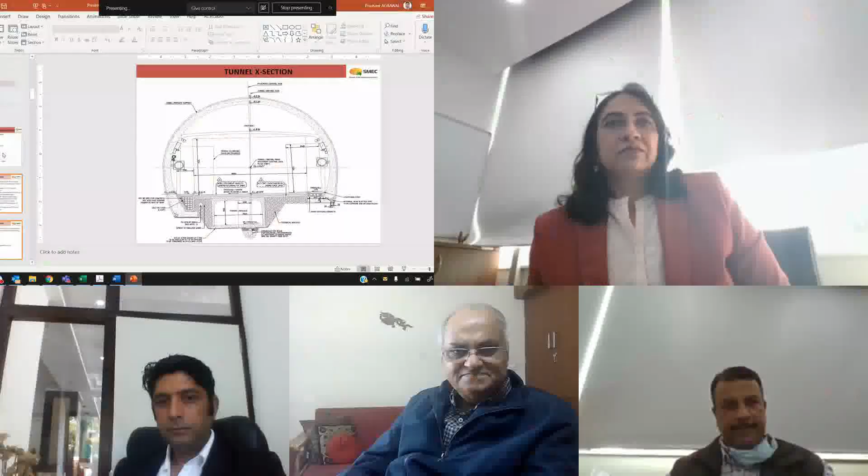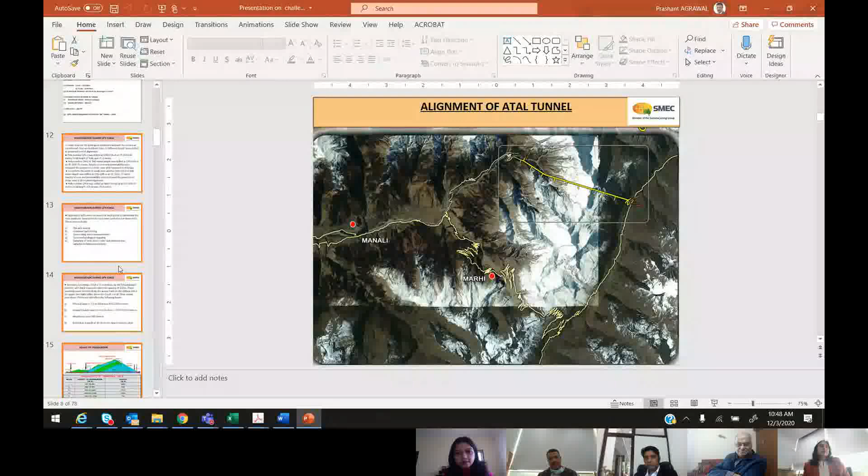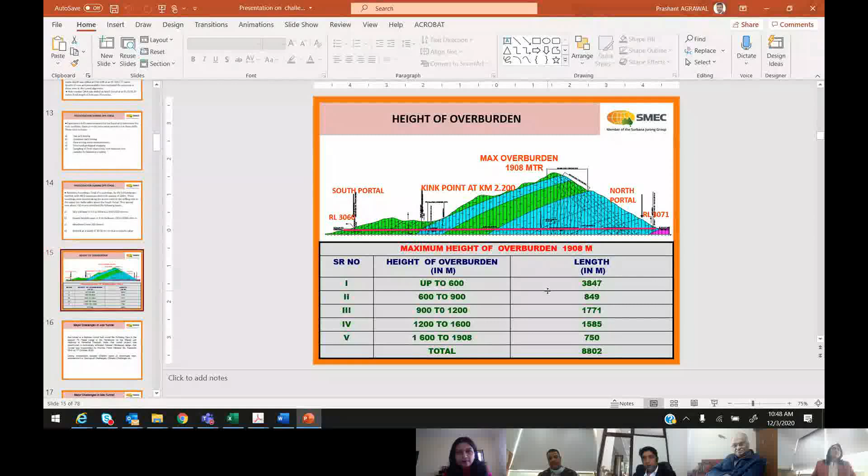If we talk about the section we were discussing a lot, how the egress tunnel is planned in this tunnel: the topmost portion is used for the ventilation system. There is a slab which segregates the pavement or traffic area from the ventilation duct. So the total tunnel is in 3 parts. The topmost is for the ventilation duct, the middle portion is for the actual traffic movement, and down below we have the egress passage for emergency evacuation. On the 2 sides you can see the cable system and the drainage pipe arrangement, which brings all the seepage water outside the tunnel. Just to show you a couple of photographs.

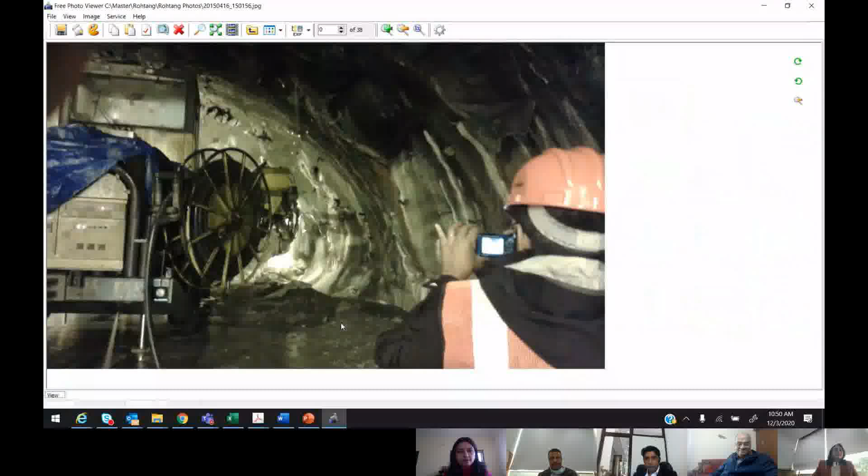Seri Nala fault flowing ground condition in the tunnel. Yeah, let me look for the photographs for the Seri Nala. That is the most talked about challenge. Okay.

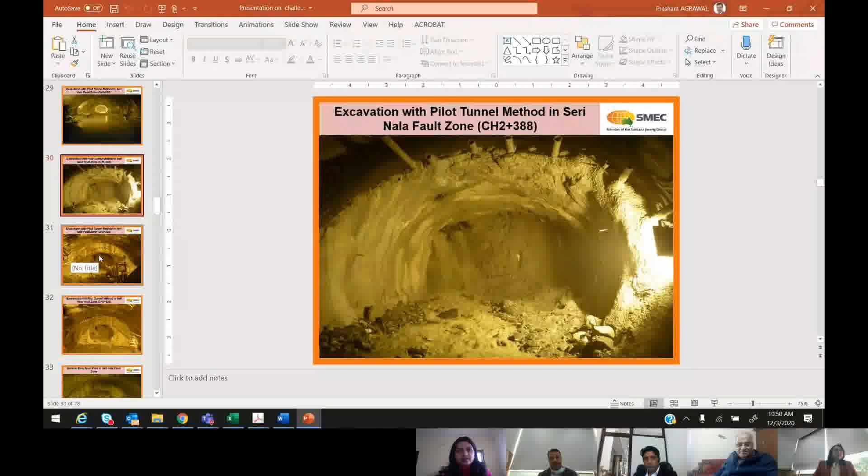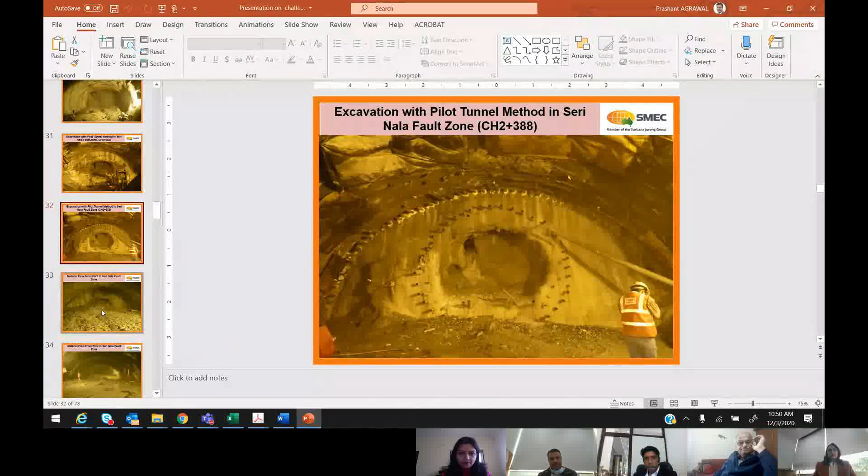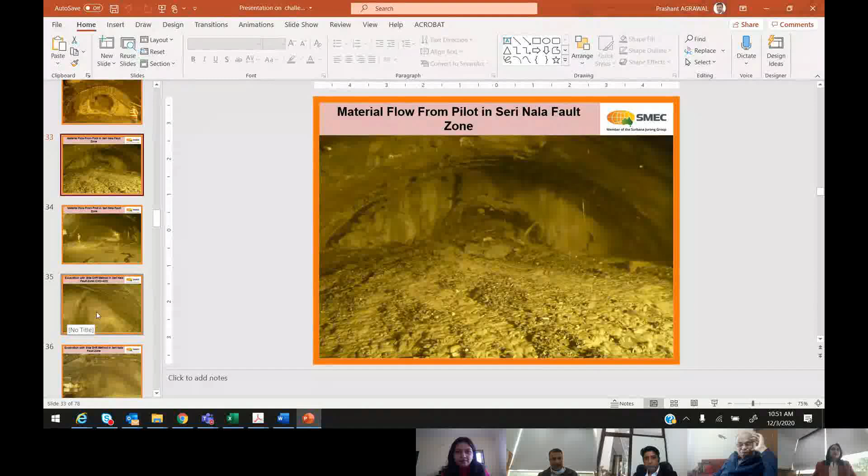So this was the Seri Nala stretch, where different types of options were explored during the excavation. You can see these are the actions taken. This was the total stretch for the Seri Nala. This was during the first phase, and with all this flowing ground condition, you can see that it was excavated through multi-drifting. These are the stage-wise excavations done in the Seri Nala stretch.

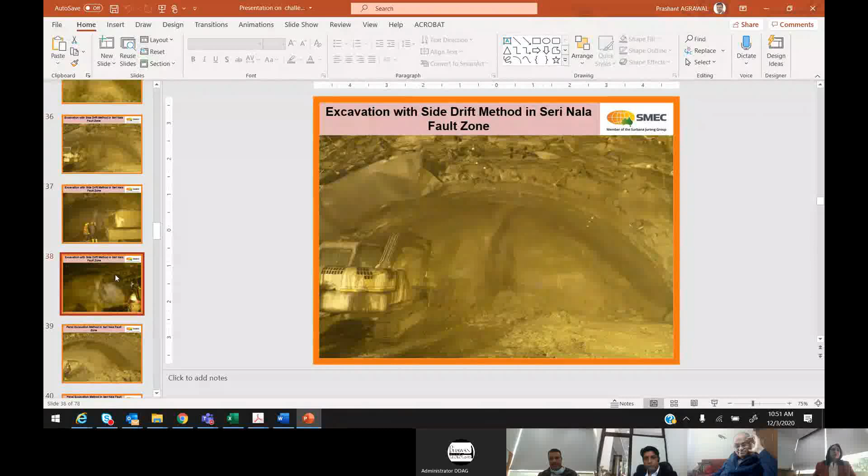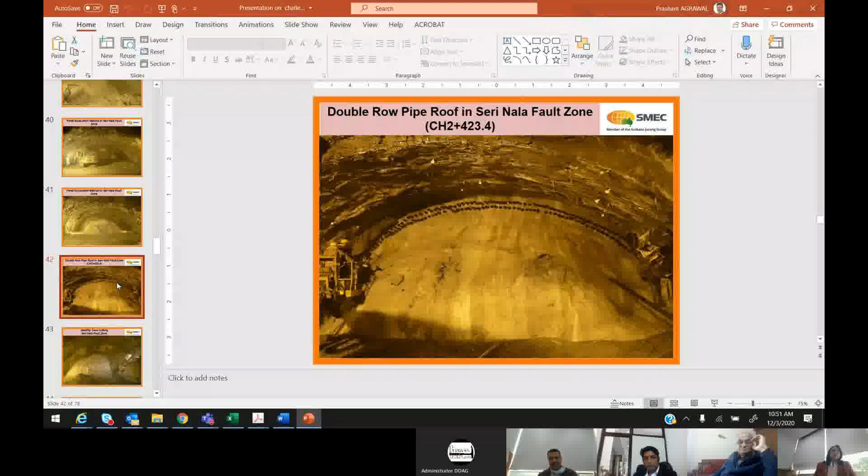I'm not able to find one video. There was a video which shows how much seepage water was coming in this stretch. It was like raining inside the tunnel. I was just trying to locate that video. So you can see this. This was the condition of Seri Nala.

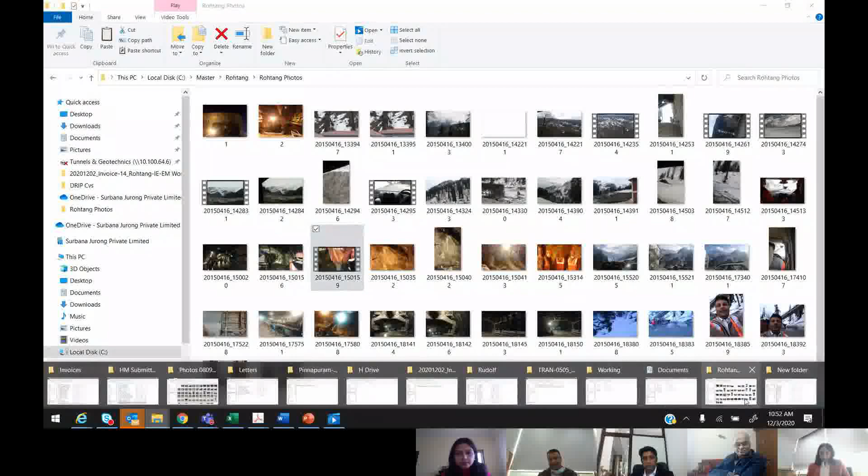And this was during excavation, but now we can see a couple of good photographs after the excavation. Wow, that's beautiful. Just let me open it so that I can quickly pass through. Yeah, so now this is the finished section.

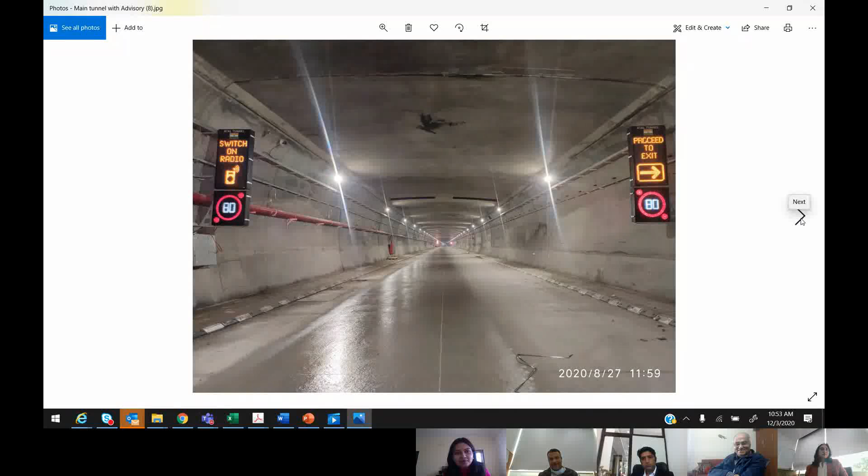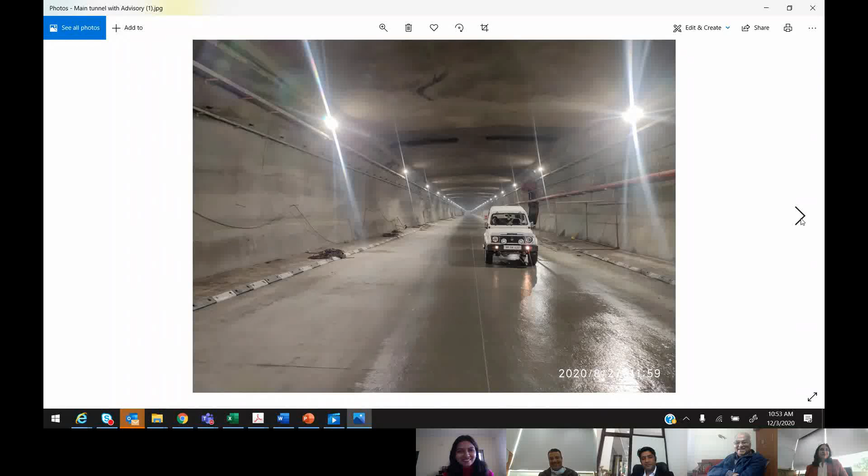While driving, one will never know what happened here. Yeah, that's exactly what I was coming to say. Now when we are driving, everybody will just forget what has happened in the last 10 years. Yeah. And you can see how the north portal looks. Beautiful.

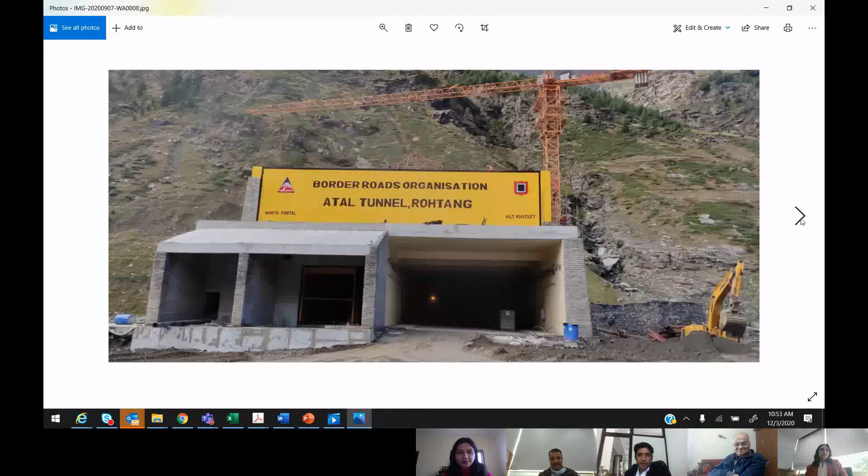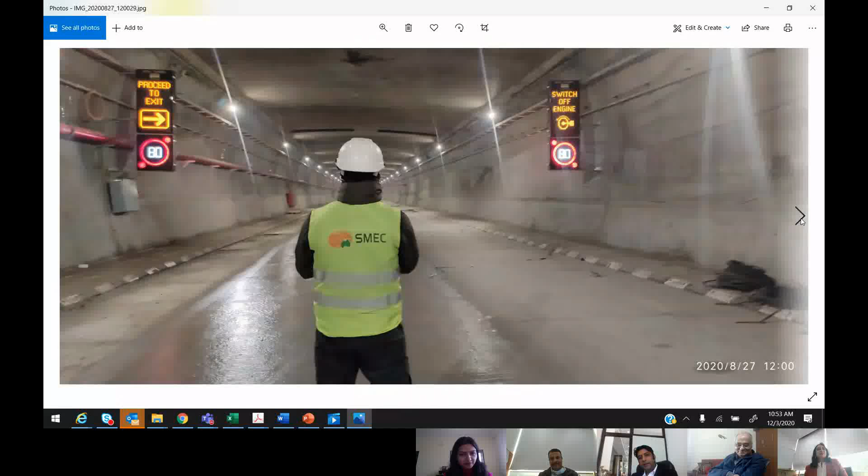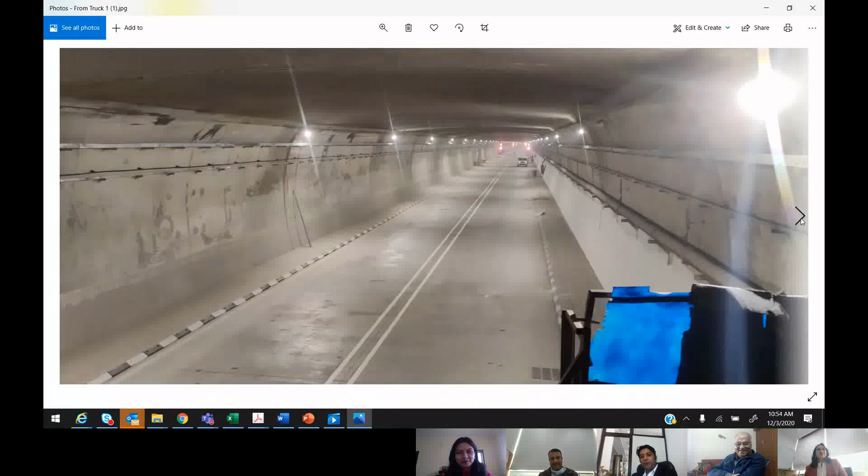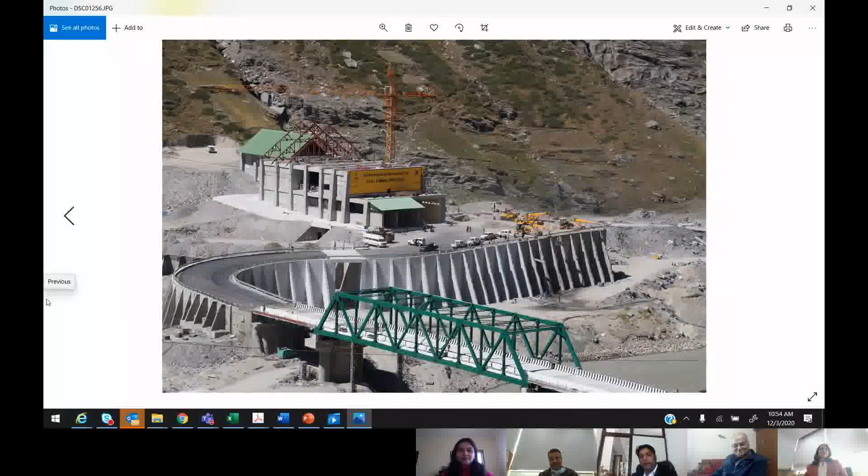Mr. Deva, the only one thing now, if I remember my time when we were supposed to go from Manali to North Portal to have a look at the work. Initially, it was taking around 12 hours, and now it's taking 12 minutes. So the scale has changed from hours to minutes. That's it. So we have a lot of saving in fuel, a lot of saving in health, because getting stuck in a traffic jam is of course not so easy. It takes 12 minutes to come from North Portal to South Portal, which was 12 hours before.

And this you can see from the North Portal side, once you are coming out of the tunnel, how this zigzag is there, and then you reach this bridge to cross the Chandra River. So there was a lot of planning which has gone into planning of this ventilation building. So this is Chandra River. Yeah. One of the two rivers, Chandra and Bhaga, which make the Chenab River. Yes, you are right. Lovely. So good photograph. So this you can see, the bird's eye view of the North Portal.

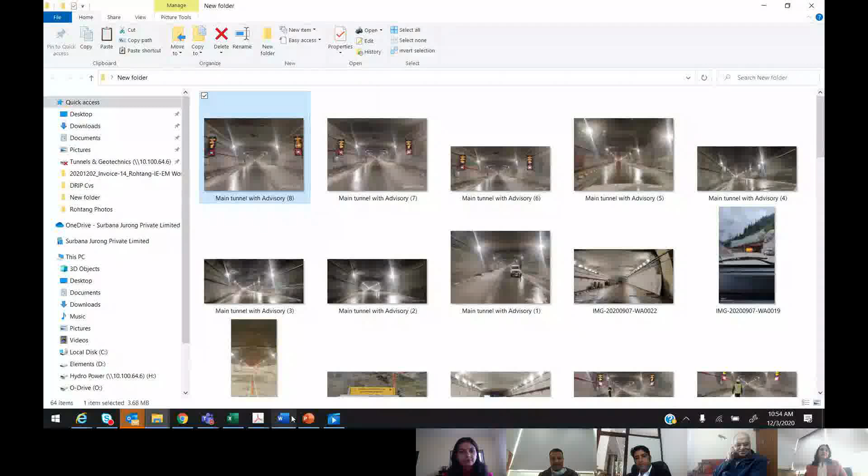Thank you very much. And before we wrap up today's discussion, I had just some small queries, I think Rajesh can answer that. One was the contractor. Who were the contractors and what was your experience with them? They must have done a very good job on this tunnel, so that it has seen the light of the day. And secondly, what was the cost of the project? Time, I think you say about 10 years total construction time. Yeah, the first blast was in August 2010. Okay. And we completed in October 2020. So it's 10 years. I think it's quite reasonable time for such a tunnel.

And how about contractors? It was a joint venture of Strabag, which is an Austrian, a European contractor, and Afcons, which is a Shapoorji Pallonji group company. So Strabag, in my opinion, is a very sensible contractor, very experienced contractor, and they know their subject also. That's the reason they got this tunnel. And if we talk about Afcons, I believe in the current scenario Afcons is doing good jobs. Yes, they have done very sensible work. That's appreciable. And finally, for electromechanical, the contractor is Savronik, the Turkish firm.

Okay. And finally, the cost in terms of rupees per kilometer in crores, and how does it compare with the cost of other highway tunnels of the same size? If madam can answer that, I don't know. Total cost would work out to somewhere around 3,000 crore, to my understanding. So 333 crore per kilometer for a 2-lane tunnel with egress is the cost. We also looked recently at the cost of some tunneling with a separate egress in J&K or in other parts of India. So cost in the present scenario works out to somewhere around 350 to 375 crore per kilometer. That's what we worked out with a separate egress.